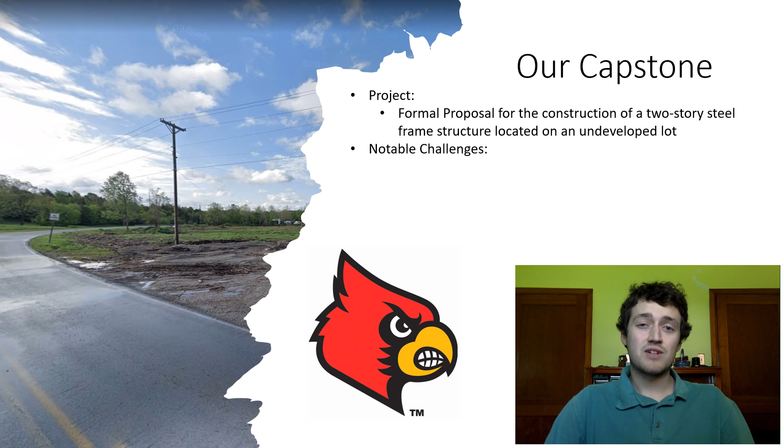There were a few design challenges which were of significant consideration, mainly including our client requested a green roof design, which we suggested as we thought that it was a very good idea. Secondly, the FEMA floodplain consumed most of our site, which became an interesting design challenge, mainly for selecting where the building will go. And the last thing we would like to note is the COVID-19 pandemic, which has thrown us for a loop, to say the least, and has made the remainder of the semester very interesting.

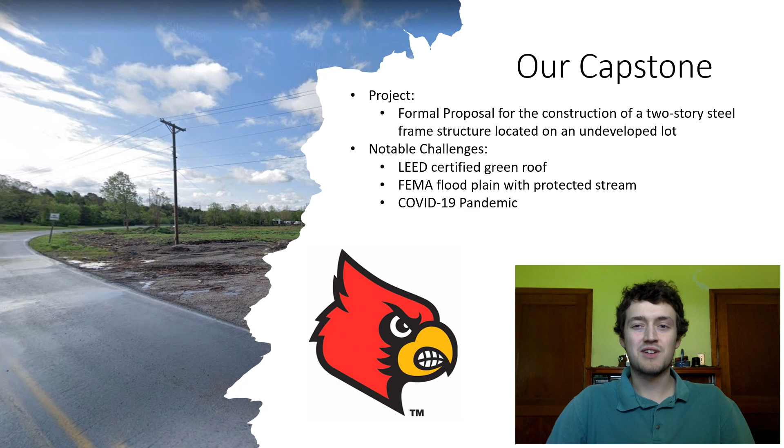The breakdown of discussion topics for this presentation will include site design by me, Connor Jackson, hydrologic design by Sarah Haynes, steel structure design by Jacob Hubbard, foundation design by Jude Hutchins, budget analysis by Drake Jesse, and project scheduling by Amanda Greenwell.

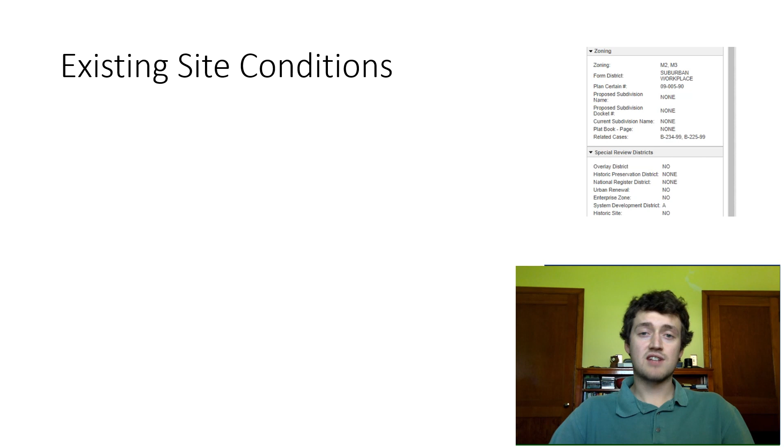As we dive into the existing site conditions of this site, we need to look at the zoning, what the FEMA regulations are, and what the district regulations are of the site. In general, we have an M2, M3 classification, which is a suburban workplace according to LOJIC. So when we looked at this information, we determined that there is a much lower regulation standard at this site compared to normal surrounding areas, because it is more out of the way and secluded from residential areas.

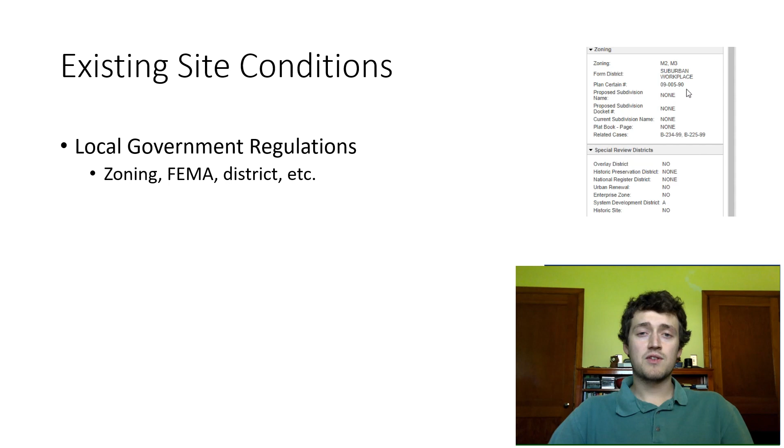Moving forward, let's look at karst as the next existing site condition. Karst is a topographic feature characterized by sinking streams, sinkholes, and caves. We're familiar with this across the state of Kentucky, as I'm sure we all remember from the Corvette Museum, and we certainly do not want that happening to our site.

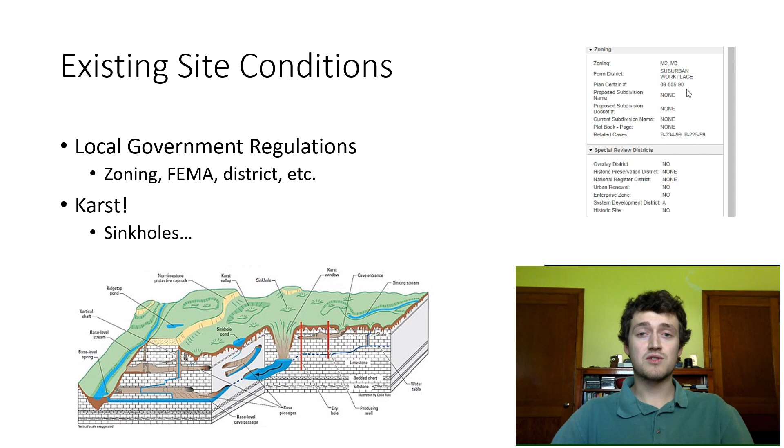So to negate this possibility of it happening on our site, we recommend a more in-depth geotechnical exploration, as it would normally be recommended, because we want to minimize the possibility of a sinkhole arising out of surprise and thus costing a substantial amount on our client.

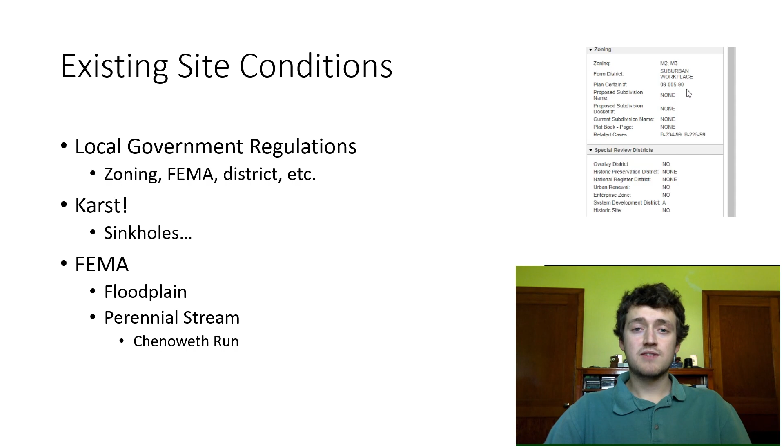This means that we have a very limited amount of space that we can use that is completely out of the floodplain, so small in fact that we cannot build out of the floodplain entirely. Thus, we had to do a little bit of grading, and we found a place that we could do the minimal amount of grading and still have a structure that is out of the floodplain. This was achieved, and we see this location as the most feasible location for the building.

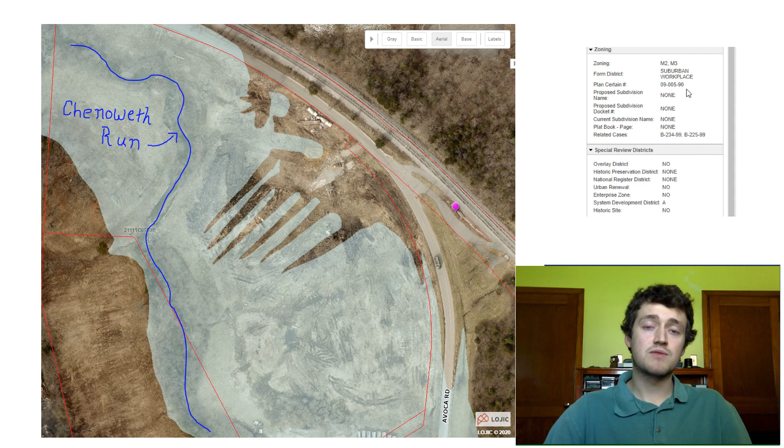Now, looking into general site design, we decided to follow a philosophy of flowing with the land. This allowed us to design for less grading, which means less work, which means saving money. Also, it gives a more natural feel to the entire site.

As we have this natural feel, we recognize that it is very appealing to more high-end businesses because it is more of the green infrastructure type wave that we see in most modern construction. In addition, we see it as memorable and unique for the customers, guests, and clients that visit this business, meaning that your image will allow the businesses which rent out your building to be more impactful on the people who visit them. Thus, you may generate more business and better business for your site.

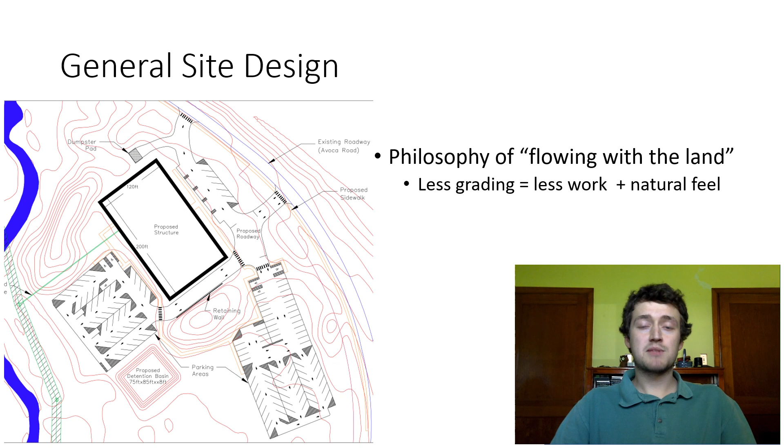Now, looking into parking design, we decided to make a more unique flow in our parking lots rather than just a cookie-cutter large parking lot that you would find, say, at Walmart, Kroger, or the like. So looking at this video, we see that we have our main entrance, our side entrance, and our front parking lot, our dumpster pad, which is out of the way from all parking.

We have our side lot, which is to be the one that's mainly used, especially for visitors, with sidewalks noted, access to the rear parking lot and the rear access, which will be used mainly for people who are working in the building.

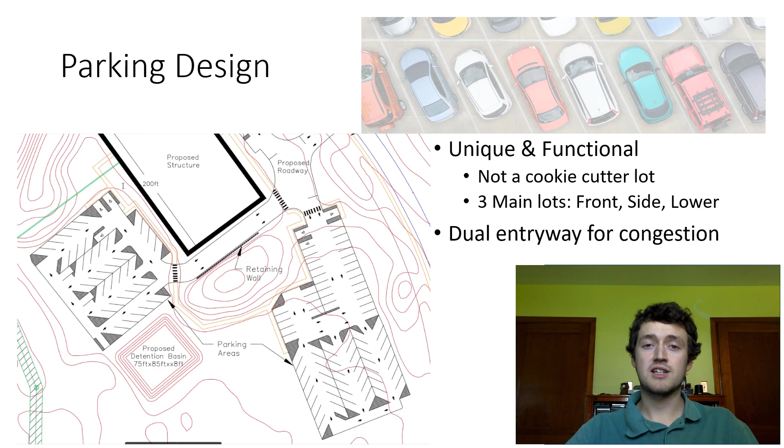Hi, my name is Sarah Haynes, and I will be going over the stormwater design and the sanitary flow design for the site.

For the stormwater, we looked at the peak runoff quantities that we would be able to see on the site. The table shown above is a summary of the calculations. So looking at those calculations, we looked at both the pre and post development for the site with the curve numbers and using the rational method.

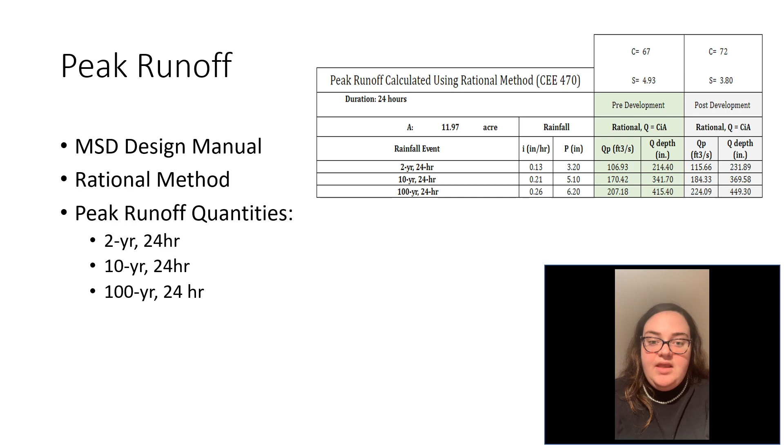We used recommendations provided by Louisville's Metropolitan Sewer District's Design Manual, and we looked at the requirements for stormwater design and calculated the peak runoff quantities for a 2-year, a 10-year, and a 100-year event. All of them were under a 24-hour duration as recommended by MSD.

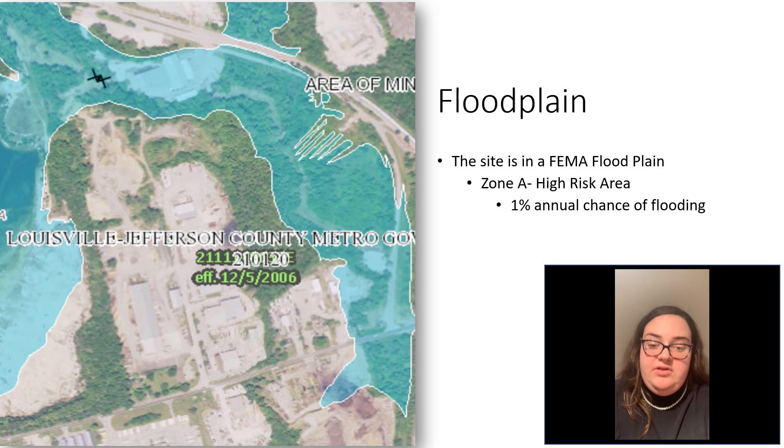The site is located in a floodplain and it's designated by FEMA as being in zone A. A zone A is considered a high risk area by FEMA, and it's described by having a 1% annual chance of flooding in the area. As directed by MSD, we used a 1-to-1 ratio for the floodplain compensation when doing the stormwater design.

So our team decided, in order to deal with the stormwater created from the post development and try to get it back to a pre-development or even under a pre-development condition, to design for a detention pond on site. Our detention pond was calculated to be about a volume of 53,000 cubic feet, which is quite large, but it also includes the floodplain compensation from the floodplain.

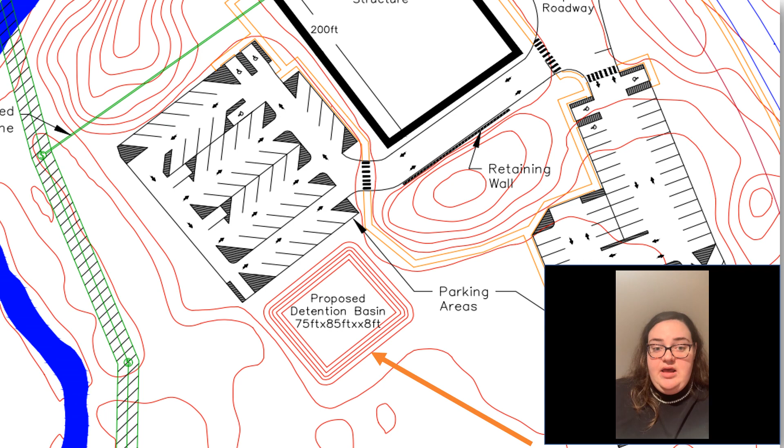We decided that the detention pond would be best placed between the two parking lots on site. We believe that overall a detention pond would be the best way to deal with any issues for the water in the runoff on site.

So for our team and the sanitary sewer design on the site, we went back and referenced MSD's design manual, and we are proposing that the sewer line will connect from the building to the existing sewer line on site, as you can see on the side.

Our team calculated that we would need a 6-inch pipe, and it would be about 220 feet long in order to connect it to the existing sanitary sewer on the site.

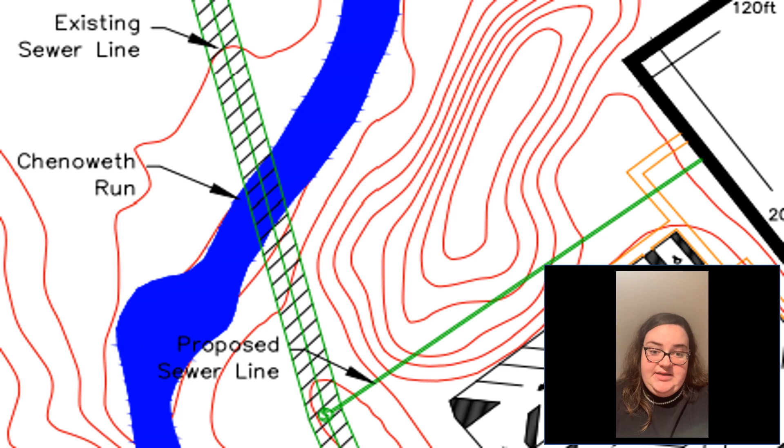Hello, my name is Jacob Hubbard, and I will be doing the structural frame part of our proposal.

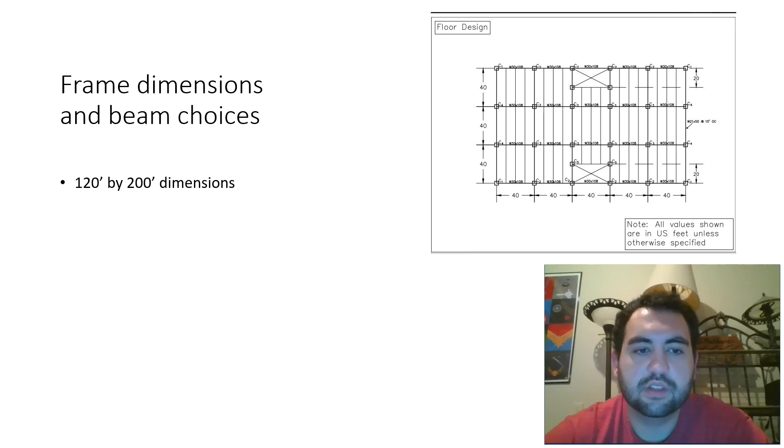Frame dimensions and beam choices. We were given dimensions of 120 by 200. We chose 30K7 joists, W21x50 floor beams, W30x108 girders, and W8x31 columns.

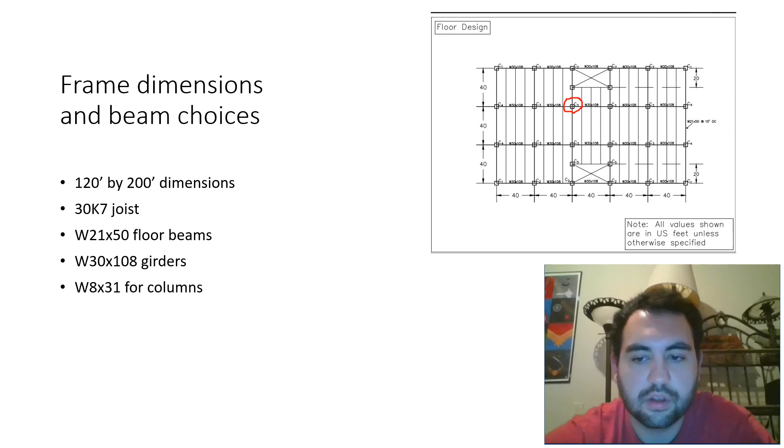There were 5 different scenarios for our columns to be loaded, with different tributary areas and different factors that made the total load go up and down depending on the column. The ones closest to needing an upsize were the center columns because they have the max tributary area and are right in the middle of the building, so they hold the most load, which will be important in the next slide.

Green roof design changes. Our design challenge was a green roof, which pretty much only affected the structural side of the design.

Green roofs are good environmental additions, but structural prices go up, and the reason for that is weight will increase because you're adding soil, trees, and stuff on top, so weight is normally directly linked to cost.

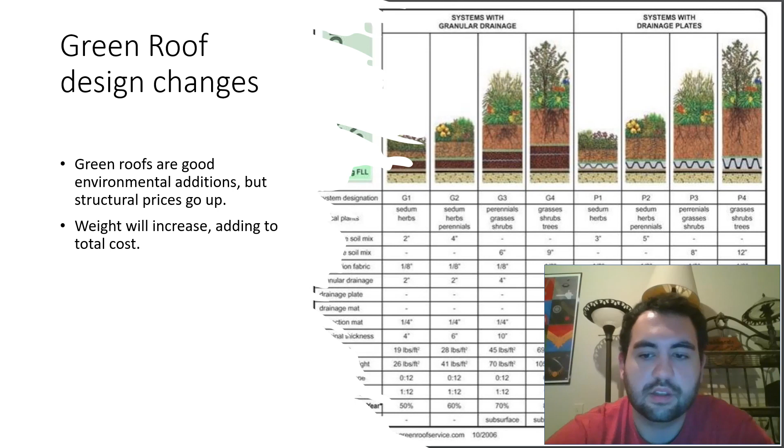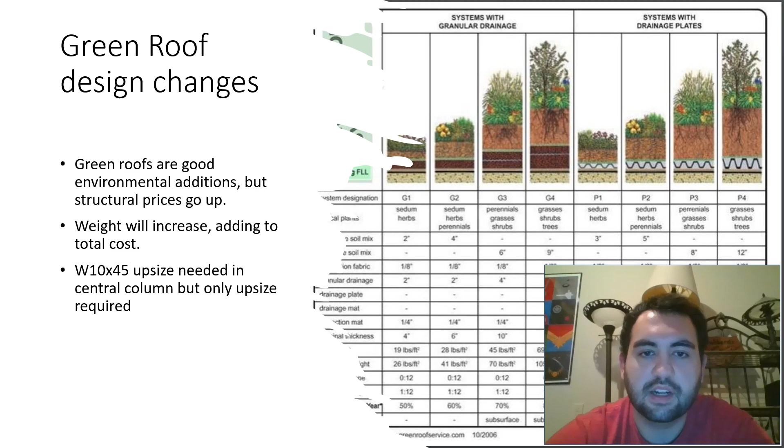With the increased weight, sometimes beams would need upsizing if you were very close to needing it, but the only one in our case that needed it was that central column I talked about, which will need to upsize to W10x45 because it was already so close to needing an upsize before we added the green roof. That little bit it added actually caused it to need an upsize.

So, green roof benefits versus hindrance. Green roof benefits are increased aesthetics of the building. From the top view, flying over, it just looks better, and sometimes you can tell from the ground how it looks. And if you're in the building, you can go up to the green roof and see it for yourself. It's like a little park on your building.

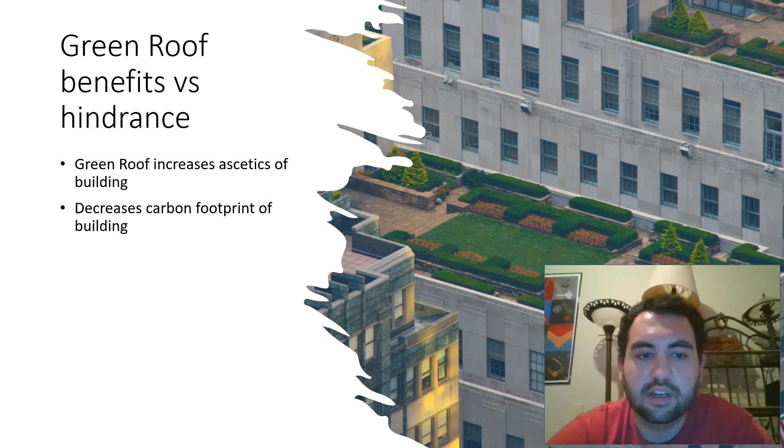Decrease carbon footprint of buildings. Even though office buildings don't have the biggest carbon footprint, it's always good to decrease where you can, and that increases your curb appeal in a way, because you show you care about the environment and you're not just all about profit, and you're willing to sacrifice money for environmental benefit. That just looks good on your company as a whole.

And both of these can lead to increased business. If you look like you care about other things besides just your profit, and you invest in a green roof, and your building looks good because it has a green roof, then that could attract potential customers.

And the main hindrance of a green roof is the increased cost of installing and maintaining the roof. You'll have more weight, therefore more structural costs, and then just maintaining the green roof once it's in. So both alternatives, one can generate more long-term revenue, and one costs more in the beginning. It really depends: do you want to save money now, or do you want to make potentially more money in the future with the addition of a green roof?

And that is our structural design part of the proposal. Thank you.

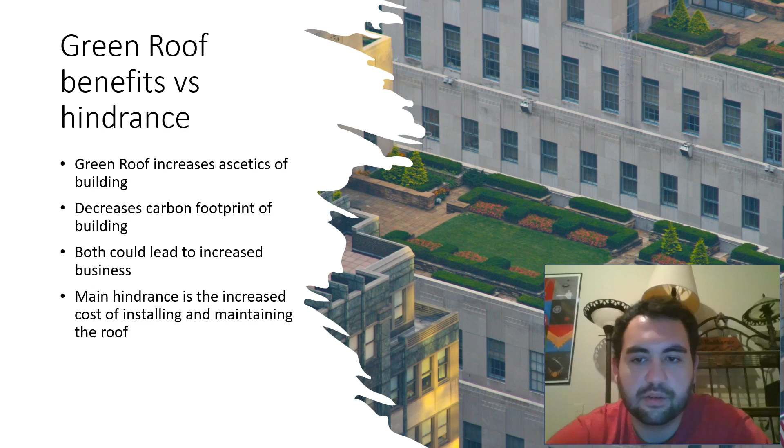My name is Jude Hutchins, and my primary technical role was the foundation design. Using boring logs, soil data, and column loads from the structural system, a deep foundation and shallow foundation system were designed for this project to weigh the advantages and disadvantages of each.

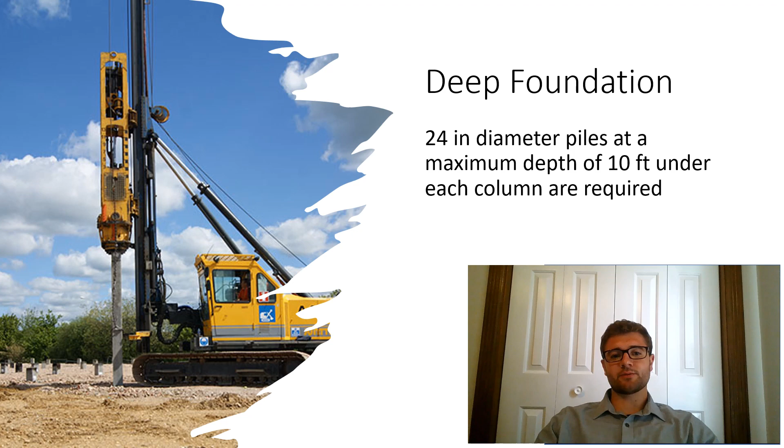It was determined that the deep foundation would need 24-inch diameter piles with a maximum depth of 10 feet under each column. For the shallow foundation, it was calculated that 13 by 13 by 1.5 foot footings, with 7 by 7 by 1.5 foot footings at the corners, would be needed.

These footings are large because their size had to be increased to meet the maximum settlement criteria of less than 3 inches. A footing sized at 13 by 13 by 1.5 feet is just not considered reasonable for a shallow foundation with our maximum column load of only 278.46 kips and an embedment of 2 feet.

A smaller footing size could be designed by increasing the embedment, because it would decrease the settlement. However, because rock is at depths of 1.3 feet to 9 feet, increasing the embedment would increase the likelihood of the footings encountering rock.

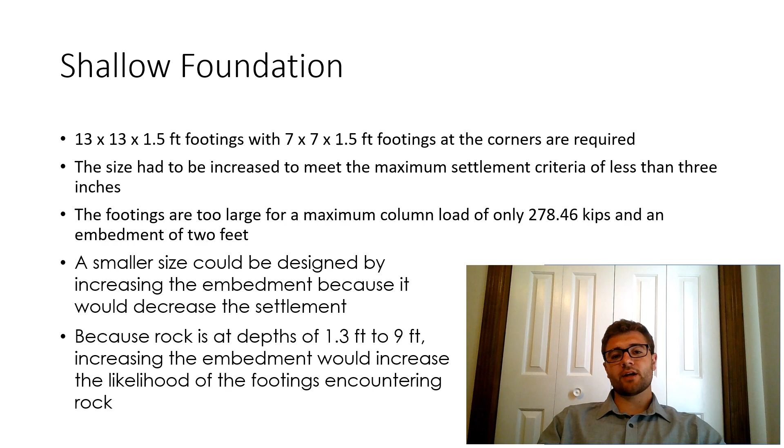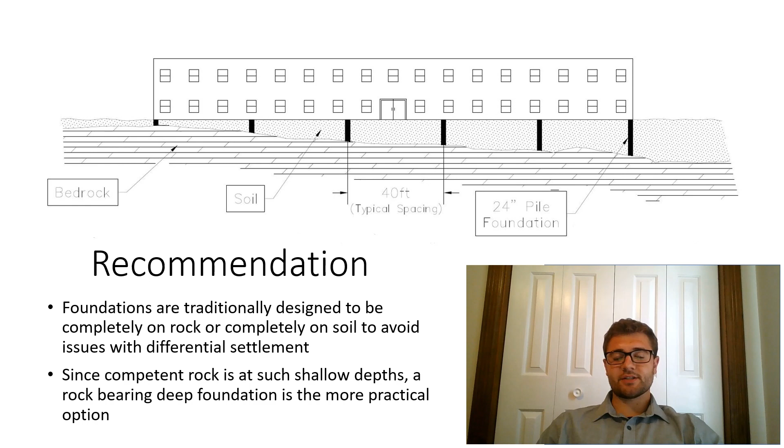If you look at the drawing above me, you can see what we expect the deep foundation to look like underneath the building. Deep foundation systems are usually more expensive than shallow foundation systems, but in this case the deep foundation system is the better option economically, because of the excessive amount of concrete that would be needed for the large footings of the shallow foundation. The deep foundation is estimated to cost around $92,000, while the shallow foundation is estimated at around $107,000.

Hi, my name is Drake Jesse, and I'll be discussing the budget for our project today. Preliminary calculations before beginning construction were as follows.

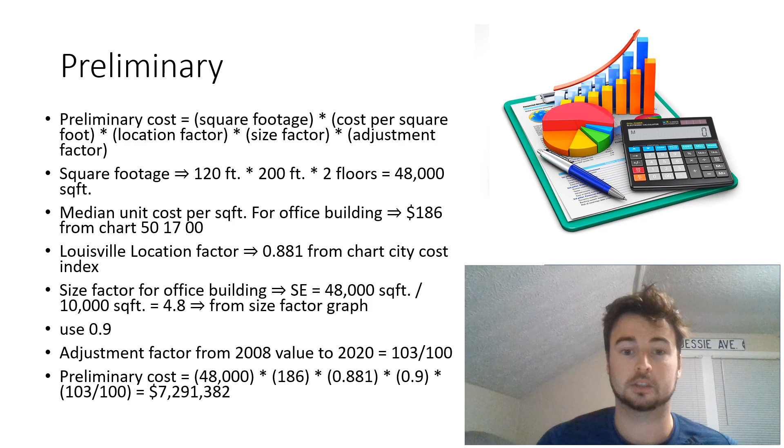Then proceed to calculate the final numbers, final cost for the client. The structural design cost will be 1.2% of the preliminary cost, which comes out to...

$87,497. The site development and landscaping cost is going to be 3.5% of that preliminary cost, which comes out to $255,198.

The overhead cost is then 1.54 multiplied by the structural design cost plus the site development cost, which comes out to $527,750, which then, when you add everything up, the total cost comes to being...

$8,161,827. And the proposed bid with profit comes out to be $8,978,010.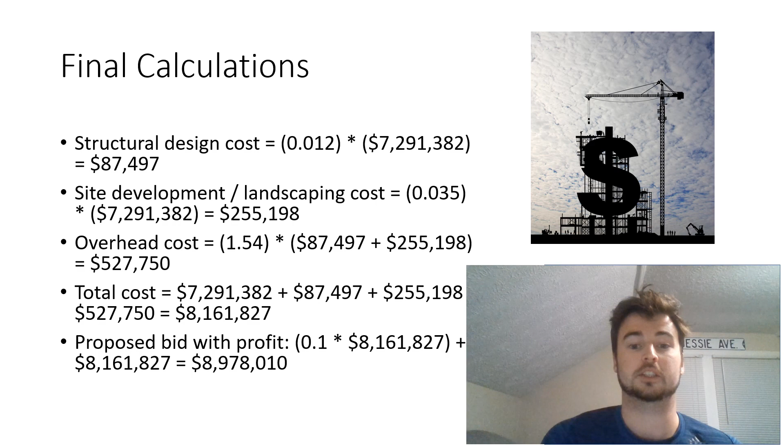My name is Amanda Greenwald, and I will be discussing River City Engineering's approach to project scheduling.

It is important to note that the majority of our tasks occur within the first few months of 2021. This is when the majority of our design work will be completed, so our team members will have to devote a lot of time and resources during this period.

The building location determination and trip generation are some of the first tasks on this list. That is because many future calculations and tasks depend on the knowledge gained from these two.

Another task that is one of the first on the list is the steel design structure for the building. This is one of the first listed because it's a very involved process and one of the longer tasks in terms of the design process.

Some of the types of tasks that can be pushed towards the end of the design process are the foundation systems report and the sewer design. These were pushed back solely because they depend on previous calculations such as site explorations and grading plans to be completed.

It is also important to note that the foundation construction starts at the beginning of the construction process, which takes 18 months. This is so that it is complete and ready for the construction of the building and steel structure.

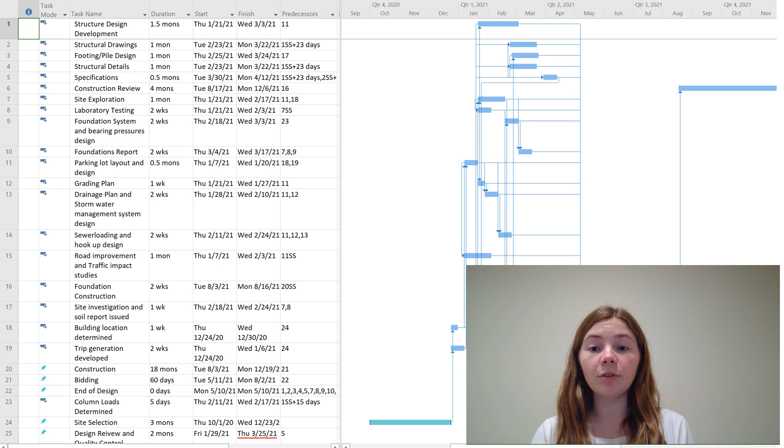It is important to recognize the dates that serve as milestones for the project's completion. Start to finish, this project is expected to take 26 months and 19 days, running roughly from the 1st of October 2020 to the 19th of December 2022. This includes everything from picking the site location all the way to the finish of construction.

Another important milestone is the day that this project goes to bid on May 10th of 2021. This was important in our scheduling process because it is a 60-day bidding process. It also served as a large milestone because all of the design work up until this point had to be completed.

Our group chose to leave a few weeks of leeway between the end of our design review and the start of the bidding process. That way, there was a buffer for any unforeseen circumstances that came up during the design process.

The construction for this project is anticipated to take 18 months. For this reason, the project takes up to 26 months. This construction is anticipated to start on the 3rd of August in 2021.

It is also important to note that River City Engineering will be providing 4 months of construction review over the portions of this project that we designed.

Project scheduling plays an important role in getting the project done in a timely manner. This is crucial to getting the project done in the allotted budget. This is something that Drake will discuss further with the finances of this project.